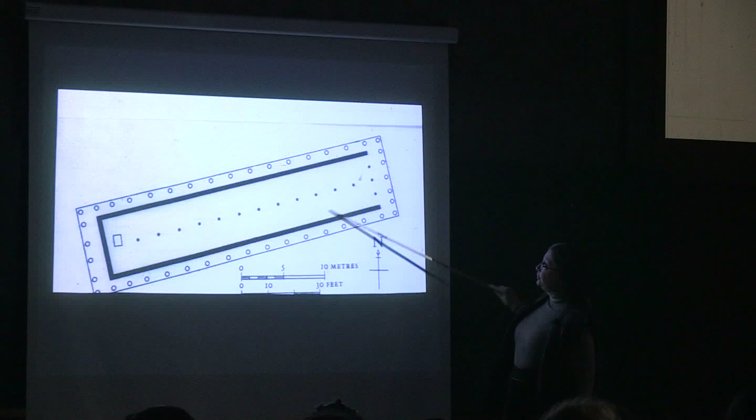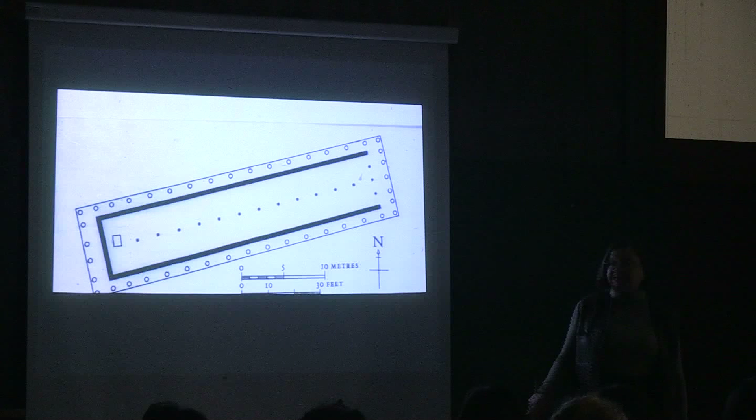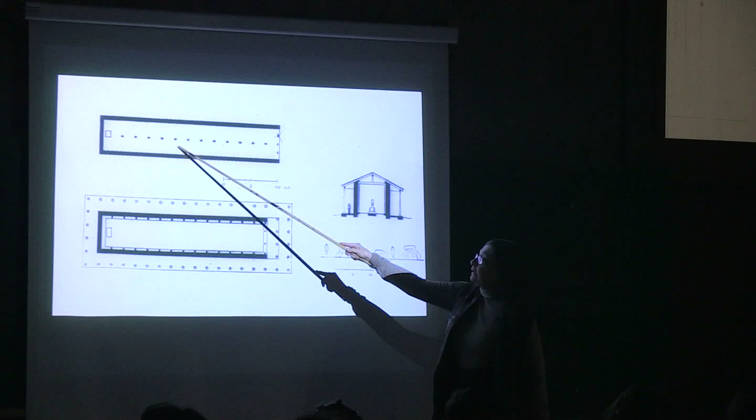So you could view the statue standing outside from between the columns, but having the statue moved to the left or to the right would create a lack of symmetry and a disorder in this regard. So it had to be there, and this was a problem which gradually had to be solved, as you see here. So in time, the central colonnade was removed.

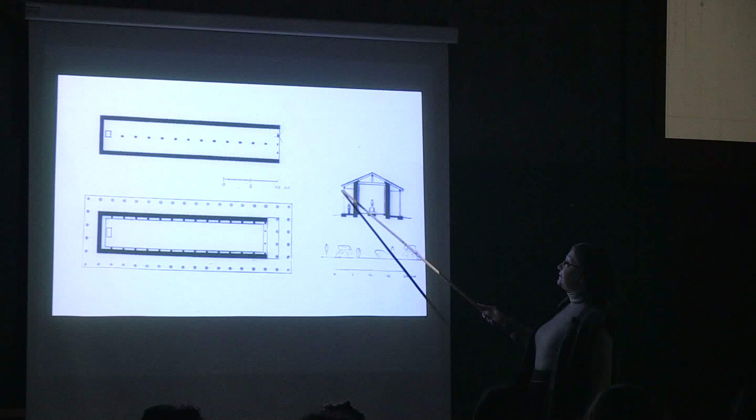The walls were sometimes strengthened as an intermediate solution, and then the whole process of the Greek temple is regulating the interior, which was of the right proportions to display the statue in full splendor in order to respect the god, and of course at the same time being able to manage the pitched roof with the appropriate height and covering in order to shelter the god.

So this process of perfecting the proportions of the temple, which was built in limestone and marble, was a similar process in the mental artistic creativity in the creation of kouros and kore statues, as we mentioned last time. So in this kouros from the late 7th century, we see the early effort of creating the ideal representation for the muscular, for the brave, and for the ideal male member of the polis, which in turn reflects the image of the polis.

And symmetries, imaginary lines, play a great role in this. And then we looked at a series of progressions, how the linear, awkward beginnings gradually fleshed out to the disappearance of incised lines, showing more muscle and more body. But because marble is a material with low tensile strength, you can't extend legs and arms in different directions because the marble will break. So these standing figures initially are very Egyptian-like.

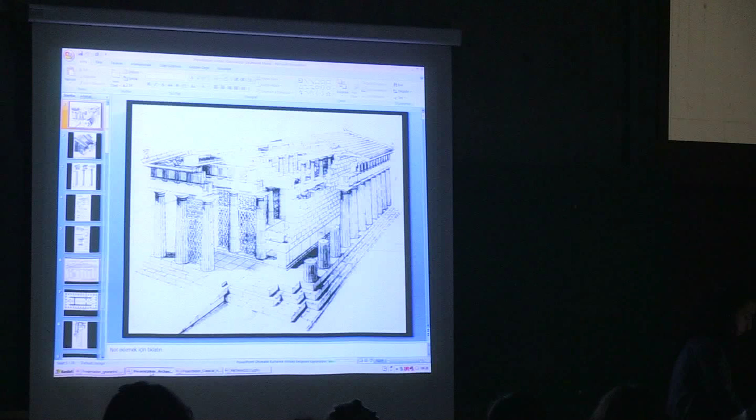So we then continued with the temples to show the same process, how it is a gradual effort to improve the dimensions, to improve the proportions. But while a sculpture is a slab of marble, a temple consists of masses of marble which are put together, in which engineering and structural problems have to be faced.

So if you look at the Greek temple in its developed state, you will notice that every part of the Greek temple, from the visible parts like the columns to the invisible parts, the foundations or the underlying blocks of stone, are done with quality masonry. Each block for the Greek temple is shaped and cut in a precise manner. It has a precise location.

The blocks are tied to each other, and the placement and the proportion of each one of these blocks has a visual purpose. So we are dealing with an architectural sculpture, an architecture which has to make a visual impact in the landscape, befitting the status of the gods.

It is often wondered how the various features of the Greek temple came into being, and sometimes the theory that the temples originally done in wood were translated in stone, and elements like triglyphs were put in to cover the edges of protruding beams is put forth.

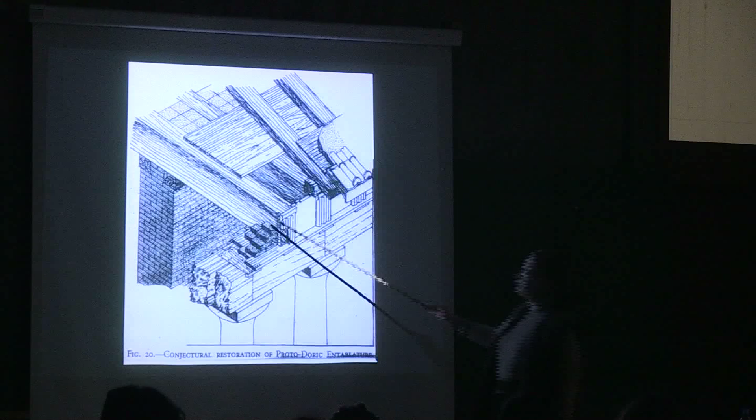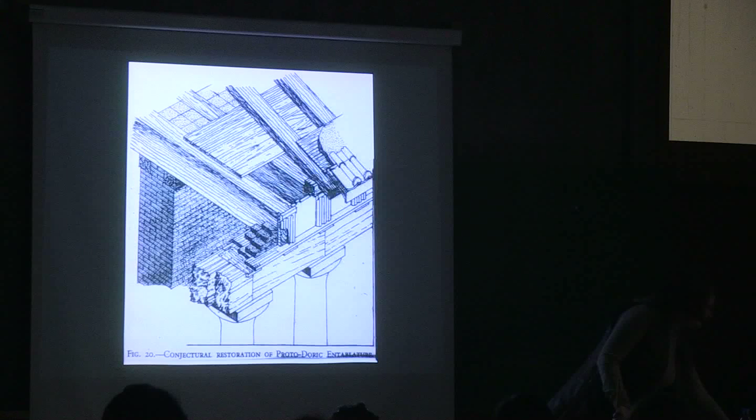But this is not without problems, because you have triglyphs on all four sides. And if you consider the beams of the pitched roof going in two directions, then it would be very difficult to explain the short ends of the temple, as we said. And then we talked about the birth of different conventions, the Doric order and the Ionic order.

The Doric order being more common in the West, in mainland Greece, and the Ionic order being more common in the East, in Western Anatolia. Even though we find that in the classical period, the Ionian and Doric orders tend to be mixed, as we shall see toward the middle of the class.

In terms of the basic characteristics, it is usually stated that the Doric order is the more stout, solid-looking order, and the Ionian one is the higher and more slender order, for the simple reason that the shaft of the Ionian order is taller, as you can see, generally speaking, and the shaft of the Doric order is shorter.

The way this is calculated is through the column diameter. So you have a measure for the column diameter, and then you have 5 times the column diameter, all the way to 10 times the column diameter, and so you have units with which you put together a facade of the temple.

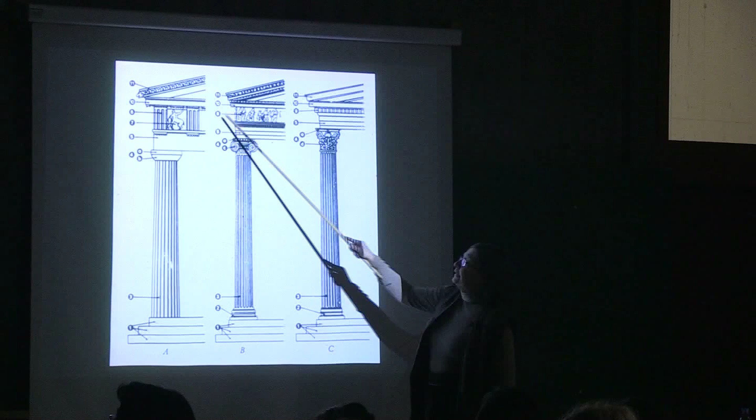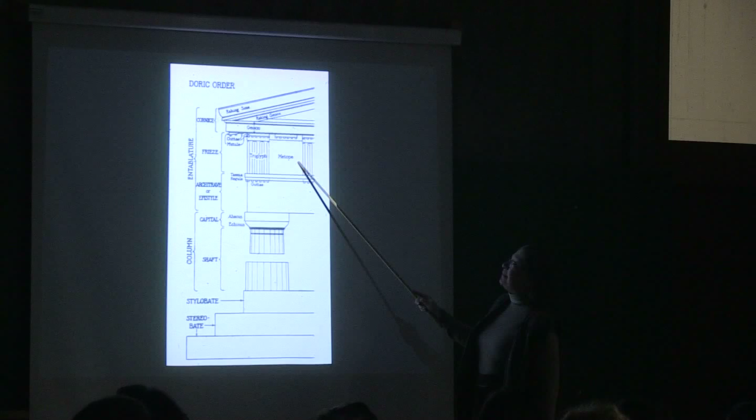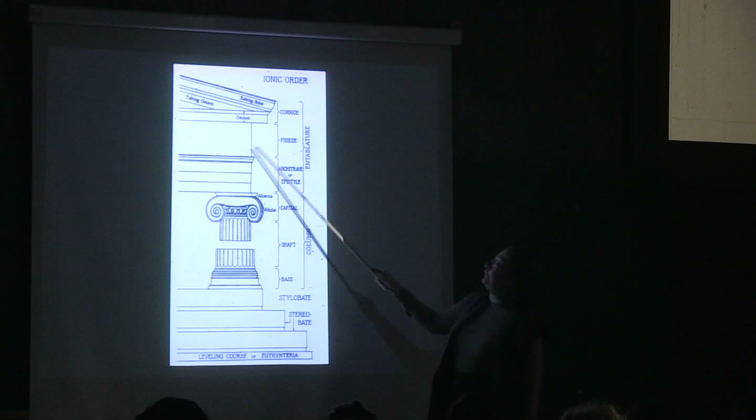Other than the columns, which have a base and a volute in the case of the Ionic order, the major difference is in the top part, as we mentioned yesterday, because in the entablature of the Doric order, we have triglyphs and metopes. But in the entablature of the Ionic order, there are no metopes and triglyphs. There is this simple horizontal course called the frieze, which had 3 bands, and which could be painted with various designs on the top.

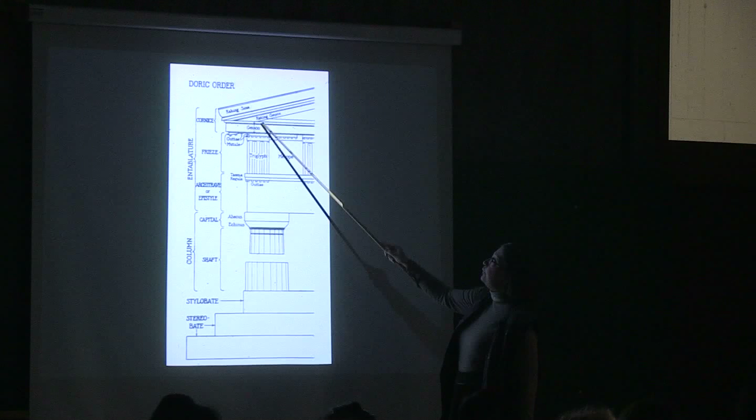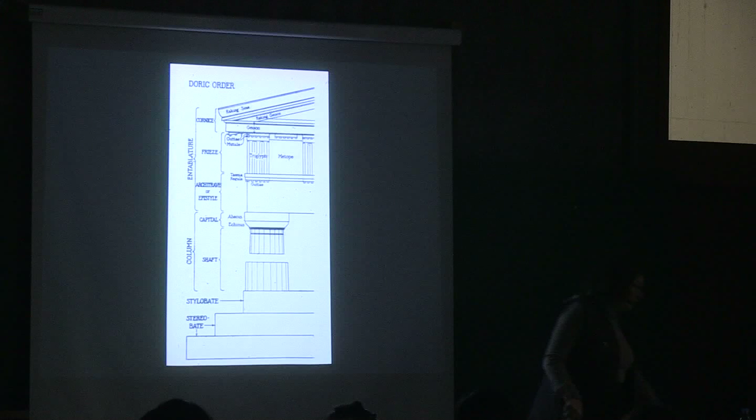The top part, the cornice, is similar for both orders. There is a pediment. So the relationship of column, entablature, and the cornice, together with the pediment, are the major variables which have to be taken into consideration in the overall design of the Greek temple. So it is not just a single column, as in the case of a single kouros or a single kore, which is in question, but it is the order.

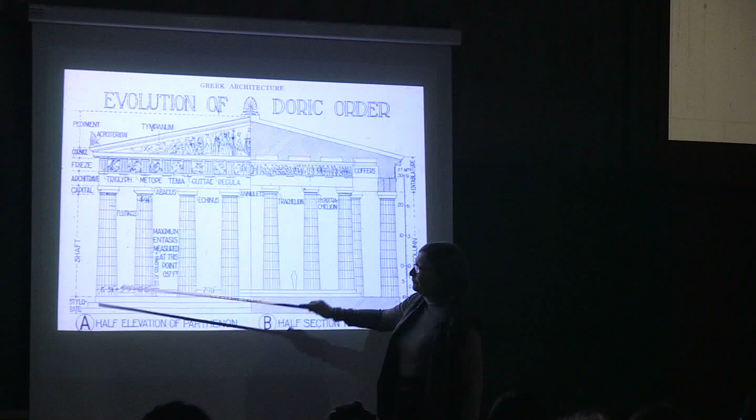It is the colonnade. So if you have a temple in the Doric order, or in the Ionic order, working with the minutest change of one element in that order will affect the entire short facade or the entire long facade. So if you play with the dimension of the column diameter, then you will have a higher or a lower column. And if you play with the number of the columns in front, whether you have 6 columns or 8 columns in front, it will affect the overall appearance, the visual perception of the facade.

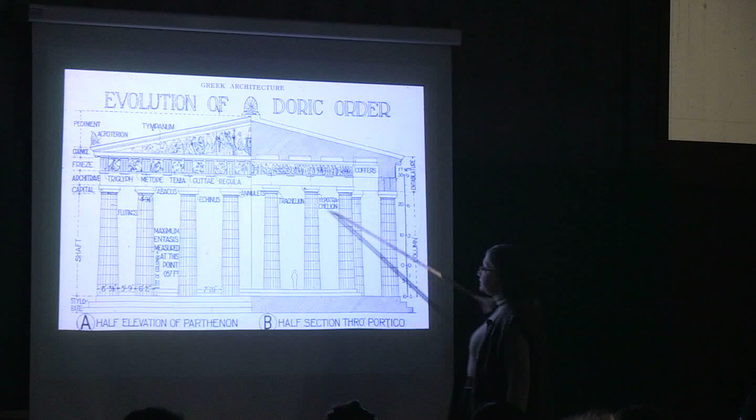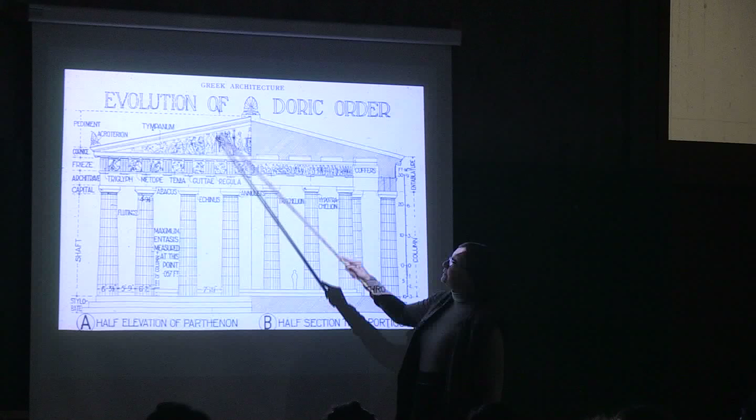And then once you play with this dimension here, inevitably the metopes and the triglyphs, the height at which they are perceived, and then the solution of the proportions of the pediment on top will also be affected. And it is very, very precise.

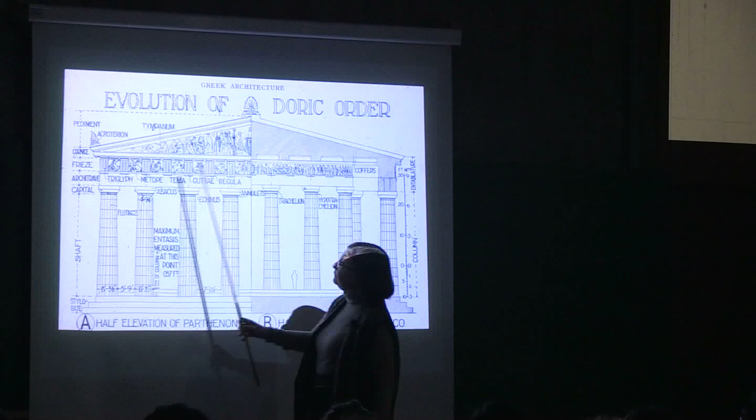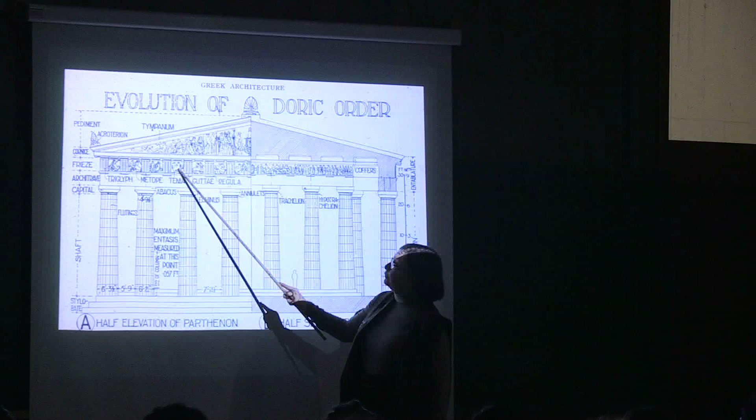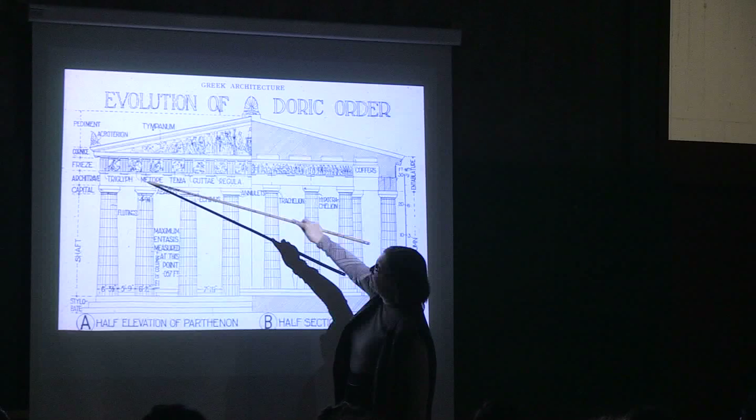When we look at the metopes and the triglyphs, we see that each triglyph is on the middle axis of the columns. And then in order not to have a wide space for the metopes, an additional triglyph is placed in the open space between the central axis of columns, in the intercolumnar axis. So in the middle of this intercolumnar axis here, you have another triglyph.

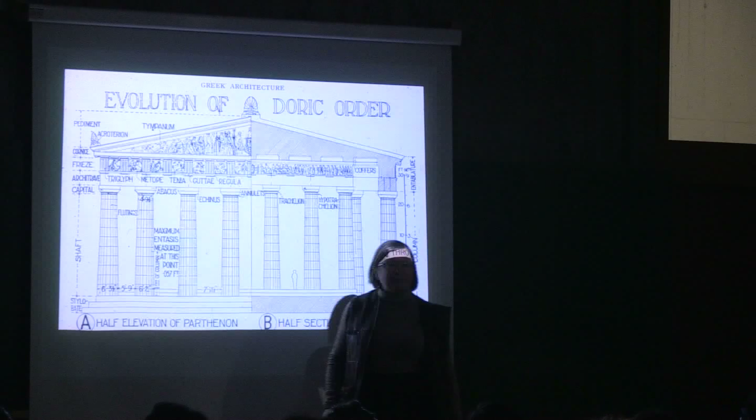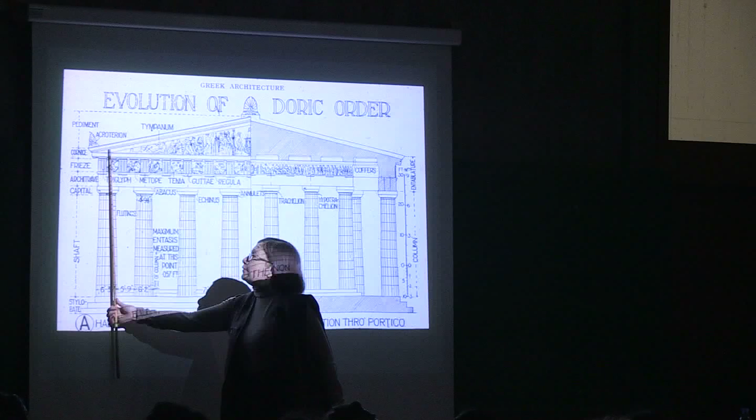So you have triglyph, metope in a rhythm, paying attention to the fact that the corner triglyph has to be adjusted slightly, with millimeters sometimes, in order to have the perfect placement. So the corner triglyph may or may not be precisely on the column axis because you need to have strong corners.

So in the most schematic sense, we have a cella, using the Latin word, or a naos, and then you have an entrance, which is the pronaos. Pro means toward, and then there is a back part called the opisthodomos, which counteracts the pronaos. So you have a kind of regulation.

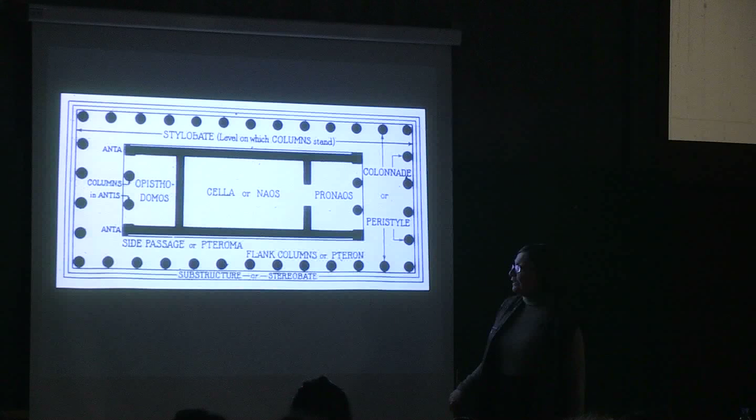If you remember the early lines on the Kouros statues, where they tried to use symmetry, in the same way, the regulation of the design of the early Greek temple paid attention to certain balanced elements of design, like the front being balanced with the back. There are countless variations, but the basic premise is usually upheld. And as I said, they work out the number of the columns on the long and short sides.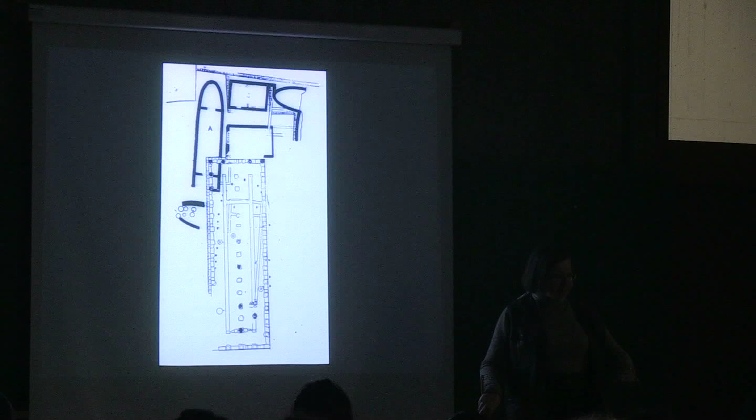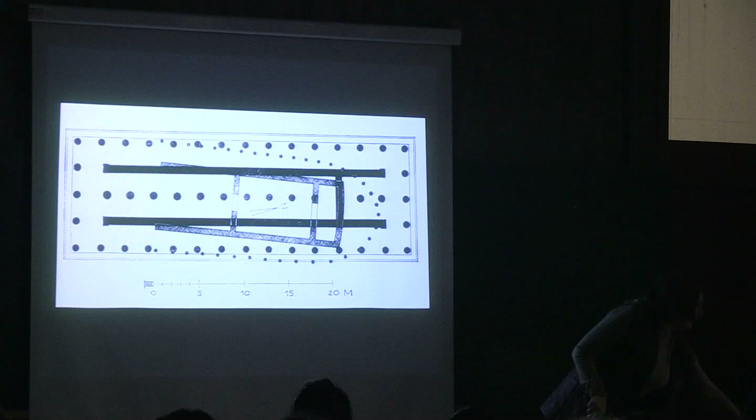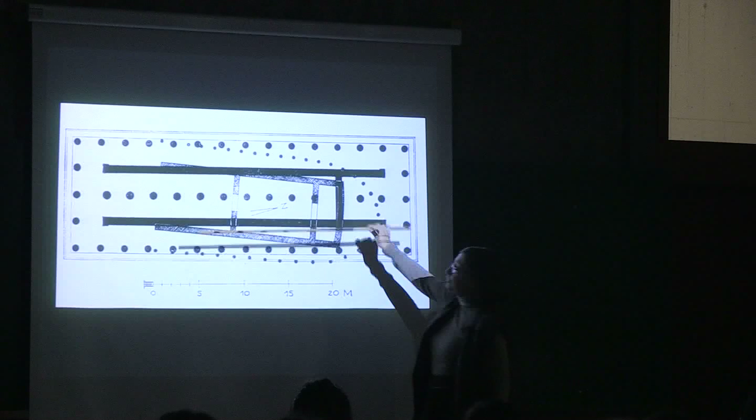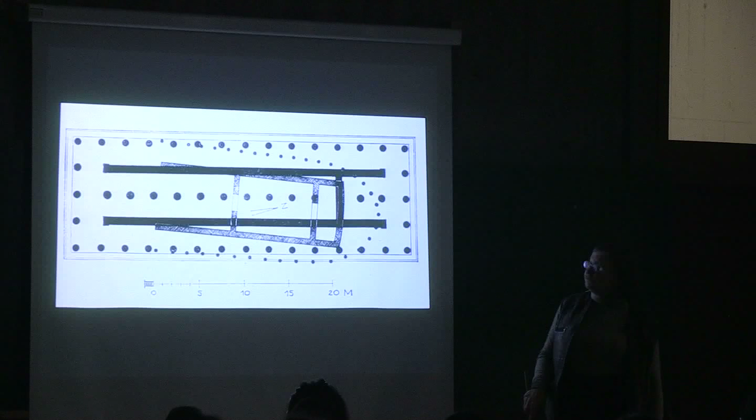When we look at the Temple of Apollo at Thermon in mainland Greece, we see the stratigraphy, the different levels from the earlier to the later. And in the earliest instances, you see that there was a long and narrow temple, a very thin, elongated structure, paying attention to the problem of bridging, spanning the distance between the two walls of the temple to carry the roof. And then gradually, that was worked out with more confidence.

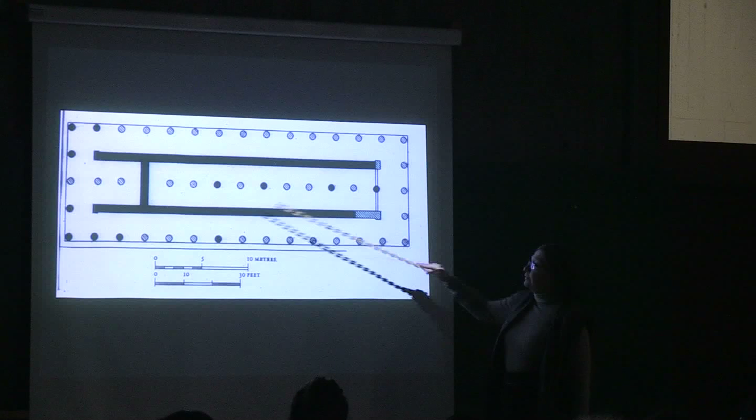The columns were added to the outside of the temple, and then the primary effort, being to convey the best possible viewing of the statue of the god, was seen in the Temple of Hera in Olympia, another temple than Thermon. But you see what they have done. The central colonnade, which existed in the Temple of Apollo at Thermon, was removed. So the view was cleared for the perception of the statue of the god.

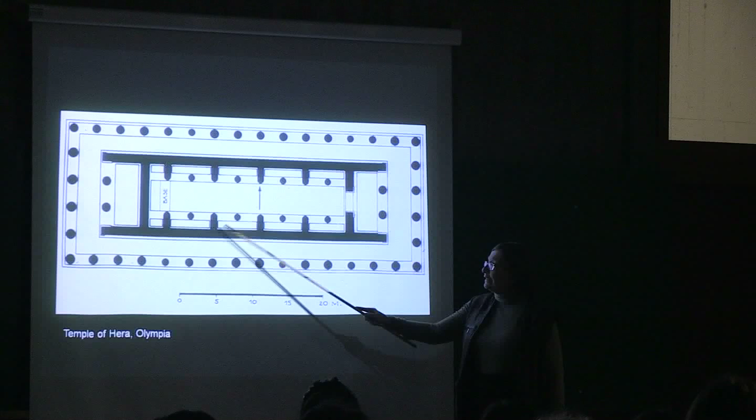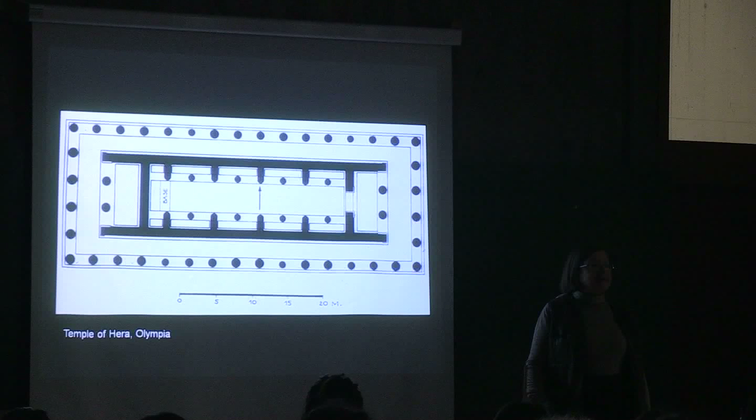But in doing so, it is a rather eclectic solution that we see employed by the Greek architects. There are these funny struts, these funny projections, which you see in the cella wall, interspersed with columns. So these articulate the interior, but they also act as supports. And they clear the viewing for the statue of the god. But this was an early example, as we said. They succeeded in that inner dimension.

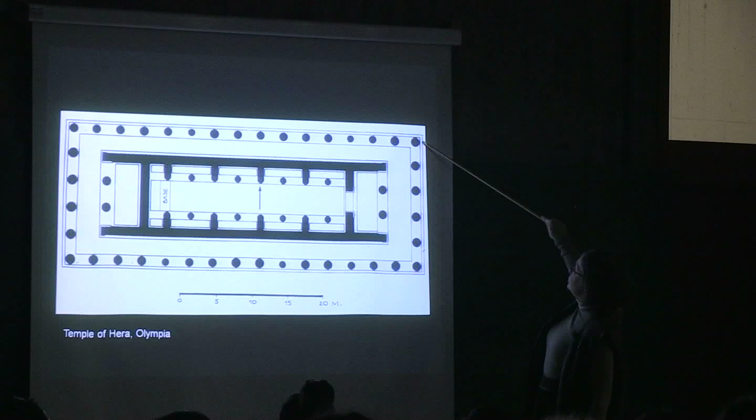But when we look at the outside of this temple, when we look at this part here, the front of the temple, what we see is a very awkward early manifestation. You have rather short, awkward proportions for the Doric order, the entablature, and then the cornice and the pediment appear to be weighing down. So the pediment and the cornice seem to be almost crushing the columns, which are so short in this instance.

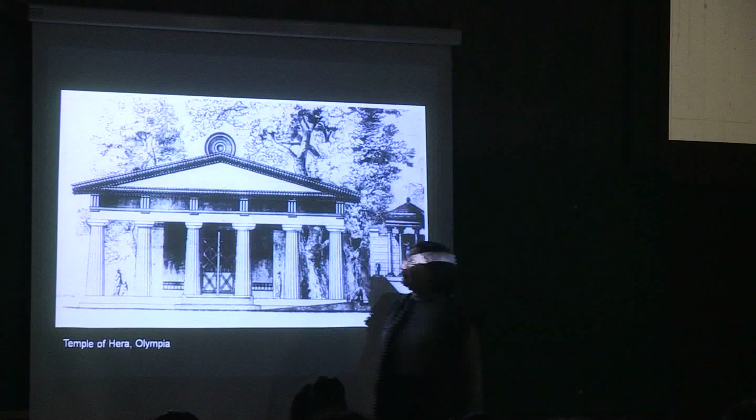Another problem is the lack of triglyphs in the middle intercolumniations. The interaxial center lacks a triglyph. So you have triglyph, long metope, triglyph, long metope, rather than triglyph, metope, triglyph, metope. That hasn't evolved yet. So they have to work this out. And in the replacement of the various elements of the colonnade, we see that the capitals are of different sizes. So these show repairs and replacements in the later period.

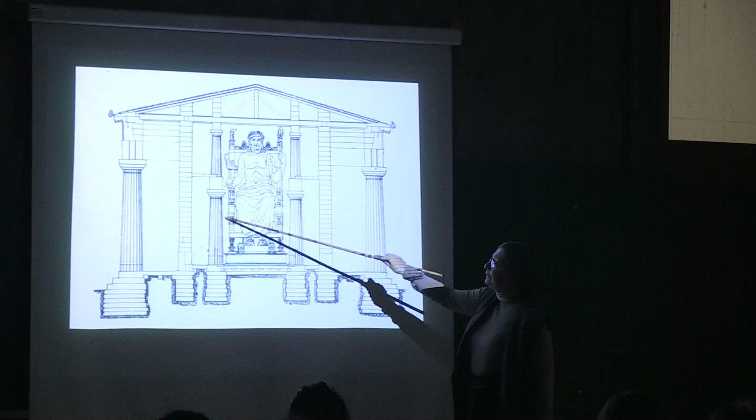And of course, while all those dimensions were being experimented upon, you have to consider the dilemma of the ancient Greek architect that all of this is being done for the statue of the god. So you could have the right appearance for the outside, but if you can't match the proportions and the scale of the monumental statue inside, then the god will appear to be cramped in a frame which is created for him.

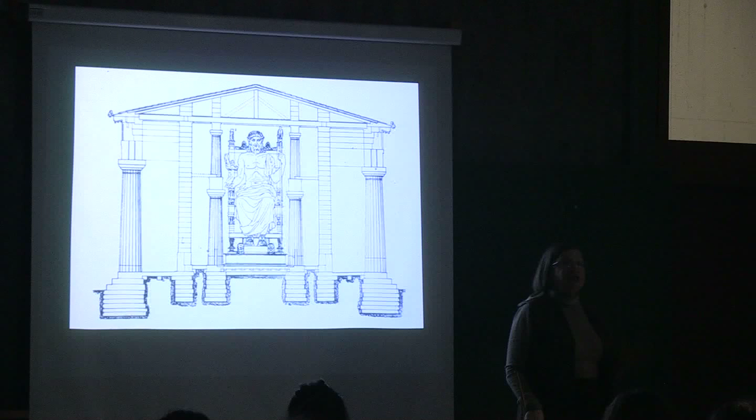And in this case, as some of the ancient writers say, the god, if he wished to do so, won't be able to stand up. I don't know how literally we should take that, but we do know that there is an effort to work out the interior as well.

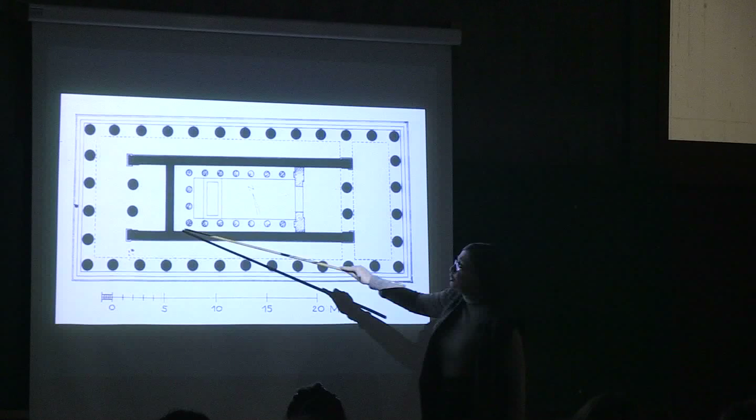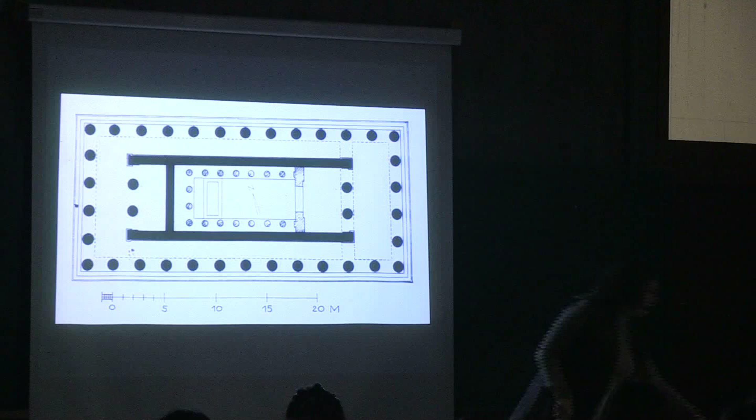And in the Hephaestion in Athens, on the Agora of Athens, we find that with this hexastyle, it is also possible to have a desirable solution for the interior, where the statue of the god is not only seen properly as it should be seen in full splendor, but he is also framed by a U-shaped colonnade. So there is an additional framing which contextualizes the statue here, pointing to the solving of the problems.

Now I have been pointing until this point to the design process, the improvement of the design of the statues, the cult statues, as well as the design of the temple, the inside of the temple and the outside of the temple. But we should not forget that involved in this design is also a very sculptural effort.

So in the temples, the sculptor was engaged not only in carving the drums, the capitals, the triglyphs, the blocks for the cornice or for the base of the temple, but the sculptor was also involved in having an appropriate composition for the pediments. These sculptures in the pediments could sometimes be absolutely freestanding, as in later periods. Sometimes they would be low reliefs and attached. But the basic problem was to create a unity of time and place, a unity of the narrative.

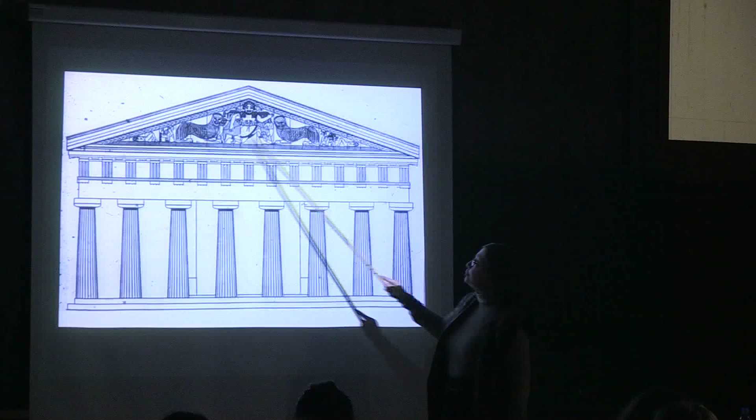But here, these panthers are accompanying the scene, and they are befitting this larger space here. They are not standing, but sort of crouching. And then, when you look at the sides here, these small parts, you see totally unrelated episodes. Those episodes have nothing to do with the Gorgon Medusa. They are tiny, and they have to do with the legends of Troy, King Priam on his throne, and other legends which were very well known to the people at that time.

And the significance of the event has nothing to do with the place and the time. It is all the difficult problem of a triangular space in which a pictorial narrative had to be inserted by the narrator, who is the sculptor, obviously. So that same problem of how to fit a narrative into a triangular space with success, and working out what kind of narrative, how many narratives, had to be worked out in time.

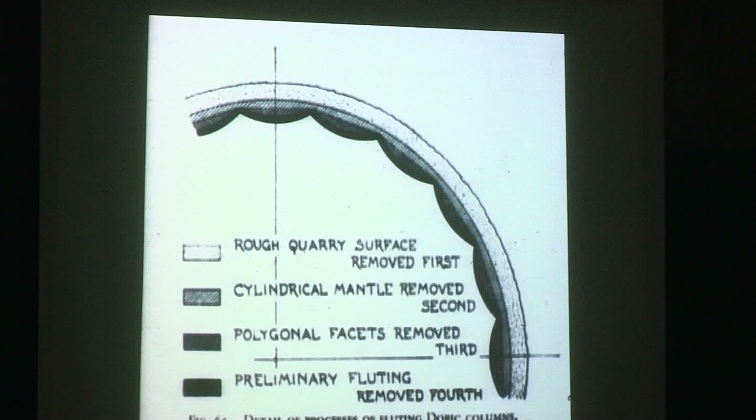So in order to prevent that, the final chiseling of the blocks, the absolute refinement, was not done until the very end. And the unfinished temples or unfinished blocks that we find in the sites of the temples give us a good idea about that. If you look at this drum from Sardis, you don't need to remember the name, you can clearly see the chiseling and the marking for flutes.

So obviously this never got to the fluting stage where this would be carved out, but we have an idea that this extra margin had to be maintained in order to maintain the solidity and visual refinement of the block.

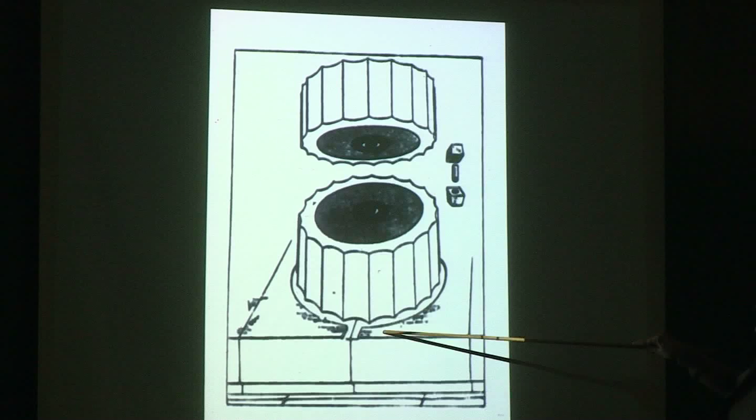In this regard, no matter what the blocks were, whether they were blocks constituting the floor of the temple, the stylobate, or the interior, or whether they were different drums, they were precisely put into place. And each drum had a depression where you could place them, together with dowel holes. So the assembly of the Greek temple was a very precise act.

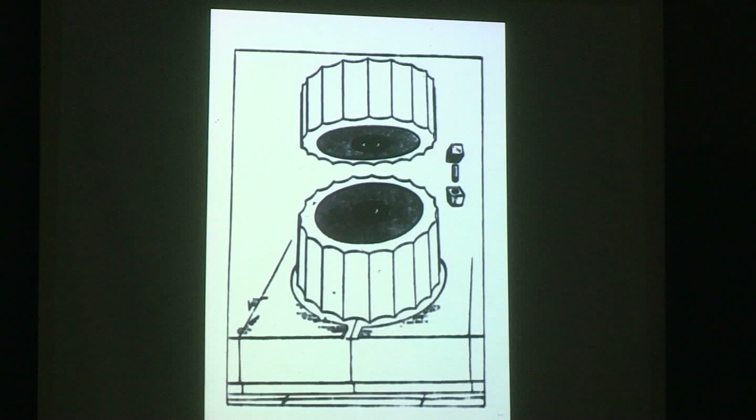Great precision, great mastery of the cutting and dimensioning and measuring of the stone had to be considered. And again, we know these from the chisel marks that we see in demolished temples and unfinished temples. In Priene, in western Turkey, the temple of Athena, you don't need to remember the names. You see the floor of the temple, you see what is underneath the floor of the temple, and you see that good quality cut stone masonry is used through and through.

And where the drums were to be placed are chiseled ahead of time. So there was a geometrical precision, a geometrical inflexibility in having the actual precise placement of the blocks. So the placing of the blocks for the stylobate or floor of the temple again were done with these precise lines, and every block had its place with great attention to detail, as you can see in this incision. So this block would be placed, but it would also have a chisel mark on top to indicate that the block which is on top of it would have a precise location.

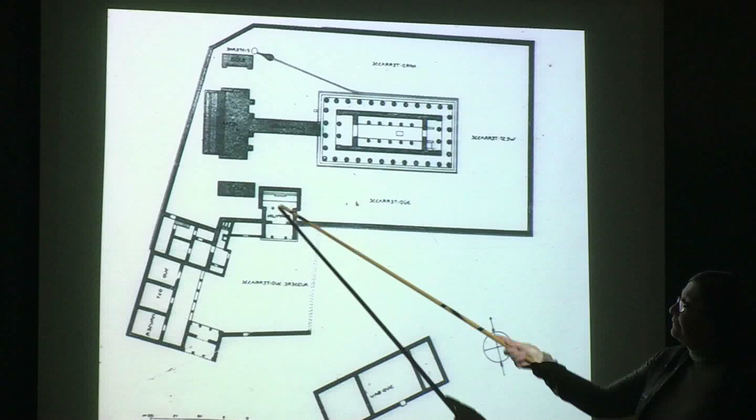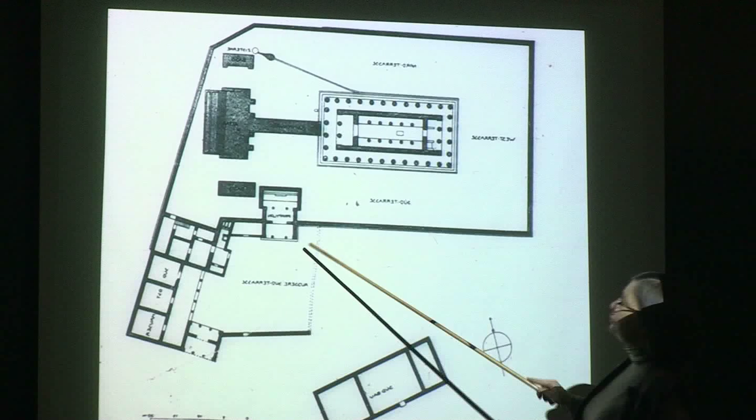In a similar way, the Greek temple was a sculpture in space. You had the Greek temple with its colonnade, and then you saw this from many, many kilometers away. And then you had a propylon, which is the gate of the sacred temenos. And once you entered through the propylon, you had a three-quarter view. You had this angular view. You didn't see smack the long side or immediately the frontal short side of the temple, but you saw a three-quarter view.

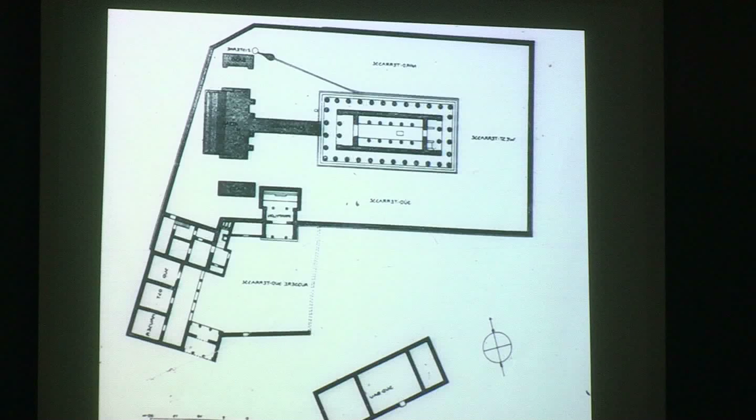And this was also practiced and practiced until they got to the building of the Parthenon on the Agora of Athens. So the Parthenon on the Agora of Athens is considered as the peak point of these efforts of the Doric artists. After the Parthenon, there was no Doric temple that was higher or that was more monumental, because it was the last point which Doric could reach in the Parthenon.

You saw the temple from many kilometers away as a proud symbol of Athens. And then as you came closer, the temple disappeared from view. And then you went through the Propylaea, which was a special gate of Athens. And then you saw the three-quarter view. Le Corbusier also caught that. The Parthenon seemed to be growing out of the rock in a natural sort of unison with the bare rock, having the man-made temple rising high up.

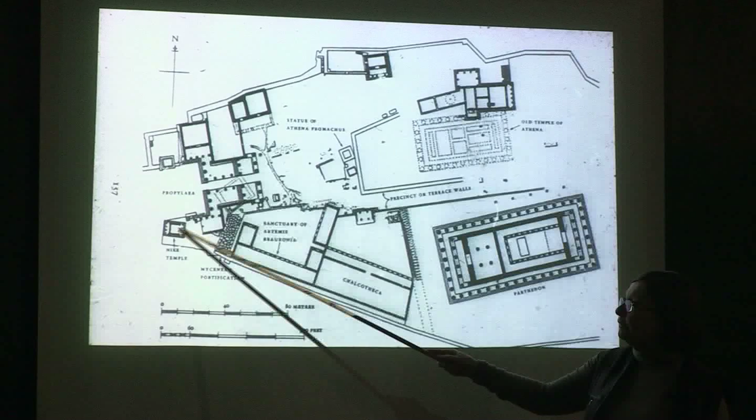There are other temples, the temple of Athena Nike here, a small temple. There's another temple, the Erechtheion here. So you have the temple of Athena Nike, you have the Erechtheion, but they certainly don't compete with the temple dedicated to the patron deity of Athens, which is Athena. So Athena is given her temple as a gift from the people of Athens in full splendor, with the full colonnade, the metopes and the triglyphs, the pediment, and so on.

So Le Corbusier also was quite impressed with this sequence. The rock of Athens, the Aegean sky, the blue skies of the Mediterranean Sea, and then the light-colored stone, shining in the air, growing out of the rock. It created the perfect union of the nature and the man-made. And this is architectural sculpture. This is a sculpture, a monumental sculpture in the landscape, which had to be visually perceived in a calculated way.

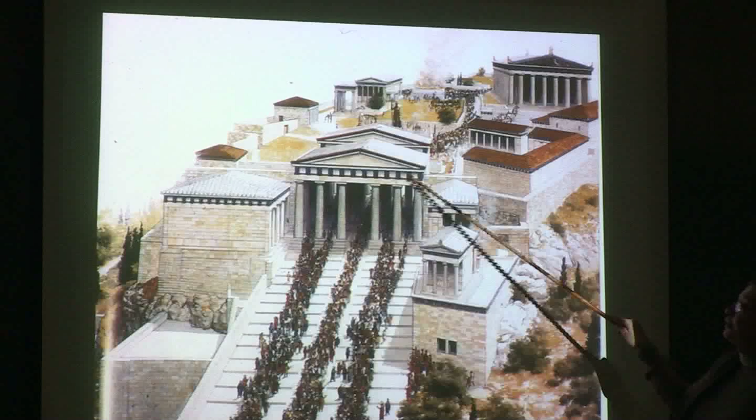I mean, we said that the Greeks did not like changing rules. They had one system and they tried to perfect it. So this kind of arrangement, hexastyle with metope and triglyph, is perfectly familiar to the eye. It's perfectly respectable. The proportions are good, but it is ultimately a gate. And because it's a gate, they have 3 metopes and 2 triglyphs,

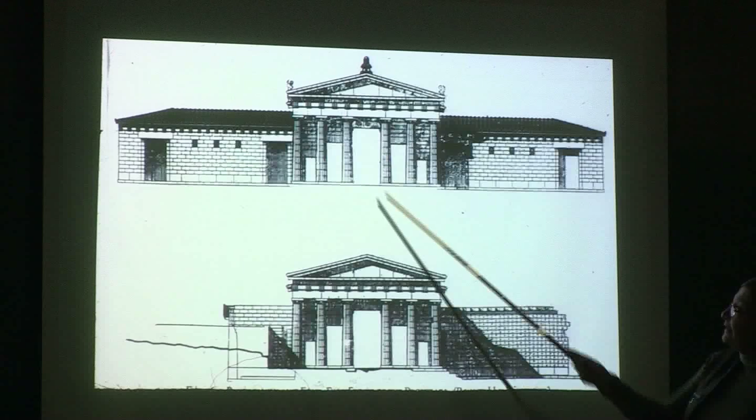because they have widened the central intercolumniation here. So even though the Propylaea looks like a temple, because it is not a temple, the Greek architect feels the freedom of playing with the dimensions, and because of the functional necessity of widening the central entrance, the number of triglyphs and metopes here has been tampered with.

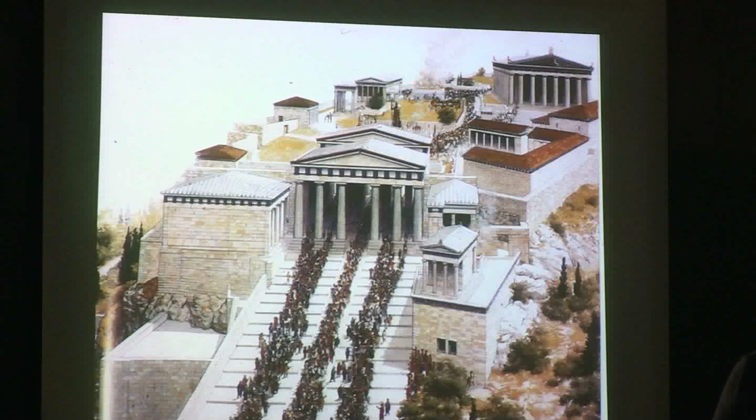But other than that, you can see that the Propylaea is not only a passage, it's also a facade which unites the two buildings on the two sides. These two buildings here are unified by having the stairs here. So you have a regulated proper entrance for the Parthenon.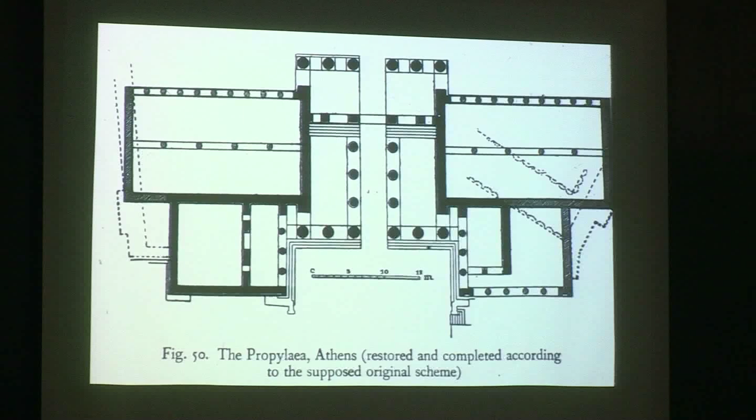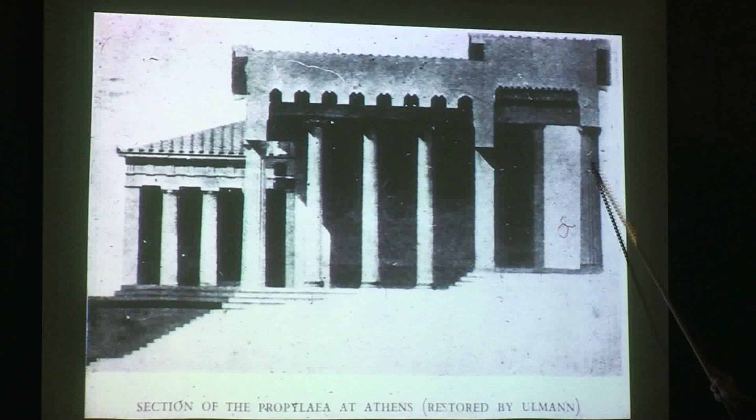And once you go through the passage of the Propylaea, as Le Corbusier also saw it, he depicted the feeling of narrowing the space through the two rising arms of the Acropolis, magnetically attracting you into the propylon through the light and shade areas. You go through the Propylaea, you come out from the inside, and your first view through the colonnade of the Propylaea of the Parthenon is this three-quarter view.

It's a very calculated view to give the perfect appearance. And when you come out of the colonnade of the Propylaea, this is what you see, the three-quarter view of the Parthenon, as you see here. And the deep shadows, the columns being bathed in light, give you a symphony of light. Light itself becomes almost like a color.

This is an architecture of sunshine. It doesn't work in places where you don't have sunshine. You have to have sunshine, if not for 365 days of the year, for a large part of the year, in order to have the contrast of light and shade, to be able to appreciate the Parthenon with the full splendor of the height of the columns, the full splendor of these freestanding figures in the pediment, and the full splendor of the carved

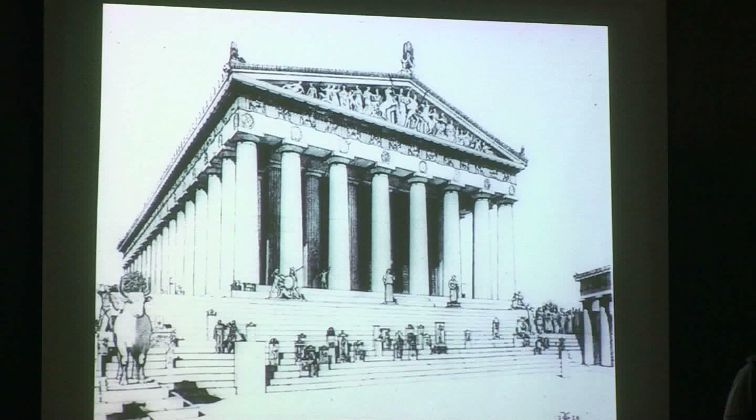metopes, each of which has a mythological scene, and they're corrected for viewing from below. So when you look upwards, you have a visual correction, which allows the perfect perception. And here you see how the shadows work depending on the changing direction of the sun.

And in this regard, the contrast of bold horizontals here with the shimmering verticals, this very kinetic effect created by the flutings of the columns, was perceived by Le Corbusier, and he decided to reduce it to this very dramatic sketch here. And to make it even more perfect, there is something that we call optical illusion.

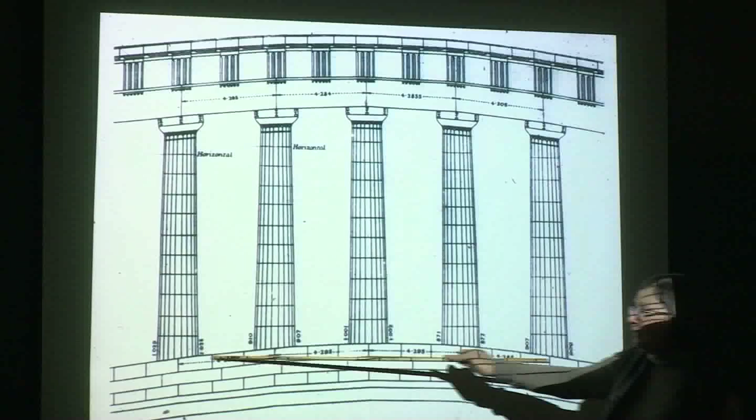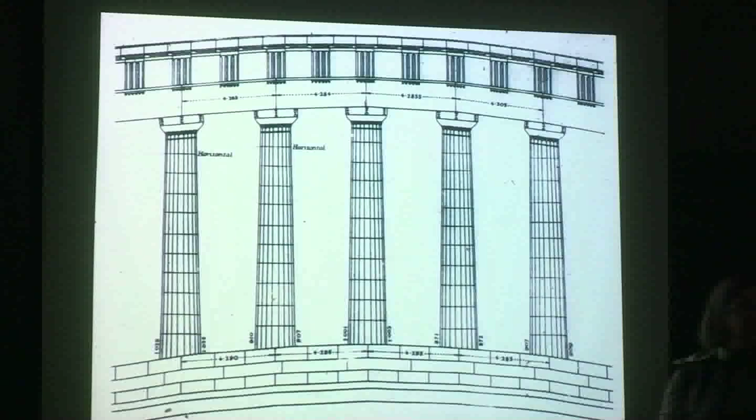So none of the surfaces in the Parthenon are straight. They are slightly convex with ever so slightly differing dimensions in order to counteract what was felt to be a sinking feeling. If this had been entirely straight, then looking at it from a distance might give a slightly sagging appearance. But having a slightly convex surface here will give you the absolute straight dynamic effect, which is not very static. So to exaggerate, nothing is straight in the Parthenon.

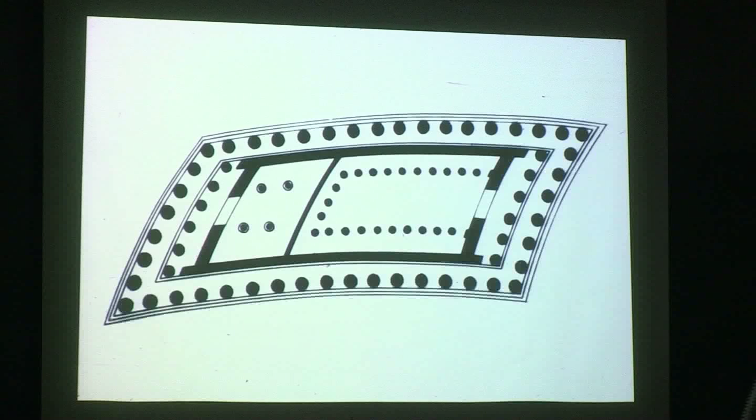All the surfaces are slightly bulging, and the columns themselves are given a slight fattening or thickening in order to counteract the effect of visual distortion. And all of this to house Athena in her setting, which was to be framed with lots of room to stand and still room up to the ceiling. There's room for the priests to come and give their attention to her.